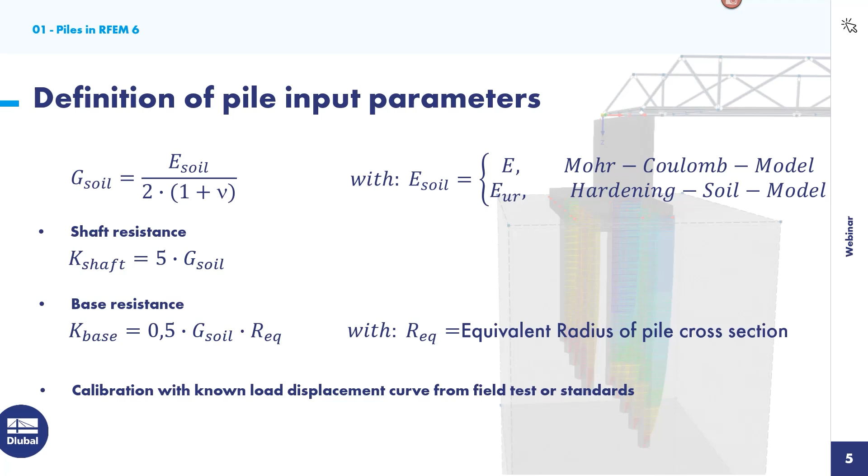Then the pile's behavior can be calibrated with the known load displacement curve from field tests or standards. So if you have a project, you either have field tests or you would consider a known load displacement curve from experience, and you can calibrate your single pile model so that it reaches the load displacement curve you expect or need for your project. If your single pile model can represent this load displacement curve, then you can use this pile input in your main model with more piles.

Yes, and we will do this. I have this example prepared—well, I haven't prepared it myself, but we use this example known from the literature, and the slides I'm currently showing are provided in the download on the website for this webinar. In this literature, you can find a deeper description for this project. There is a pile load test done in this Alzey Bridge project, and this curve was received. Our aim now is to reach a load displacement curve that fits this literature result.

The shear strength and shear stiffness, and the axial strength and stiffness, were calculated and then put into RFEM, and we received the load displacement curve. This model we will now create together. So therefore we go to RFEM now.

I just open RFEM, and via this button we create a new model. We get to the base data where we can give it a name. I will call it single pile model. And yeah, that's it.

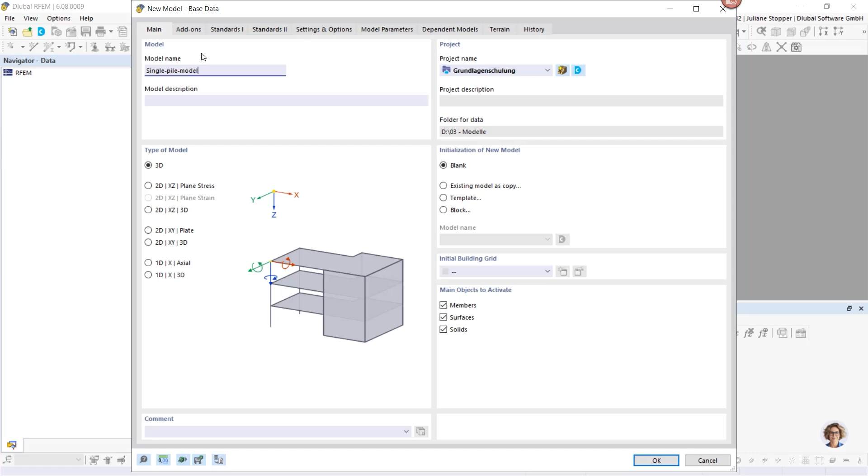We can now go to the next register, to the add-ons, and here it is required to activate the geotechnical analysis add-on, which you find here in the special solutions, and we also need the construction stages analysis.

With activating these add-ons, our main program, the finite element analysis program RFEM, gets these add-ons' input options integrated, and also the analysis, and you will also have the output in the main program. So these add-ons are directly integrated into the main program. You can work in the main window, which is a good thing. It's easier to have a good overview of your model.

Okay, so now we have an empty model prepared, and I would like to delete all unassigned basic objects. RFEM keeps in mind which objects you used in your last models, and provides these in a new model because you might use similar materials or sections or something. But I want to start from scratch, that's why I deleted them.

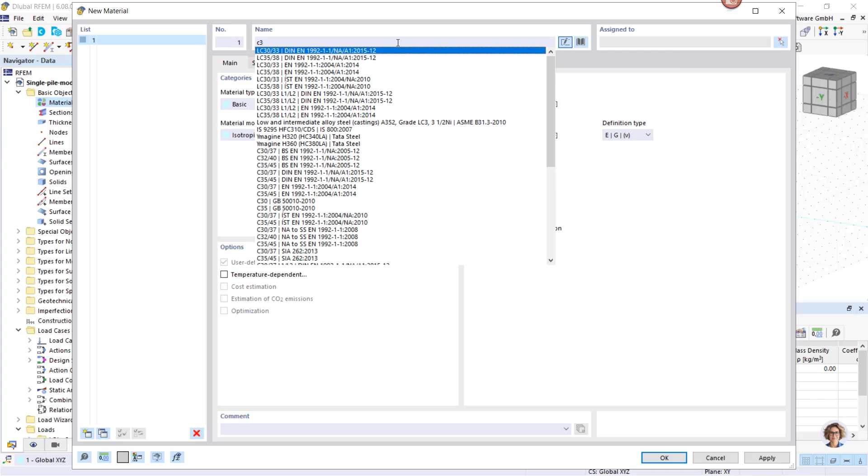Okay, now we can come to the material. I do a double click here and come to the material dialog, and in a first step we will define a concrete. I will take C30/37. We can maybe change the standard. Yeah, we take this one just for the start. I can go on apply, and I want to make it user defined as I want to change some values.

The specific weight is reduced in this example as it is a 1D object, and in the area where the cross section would actually be placed of that pile, there is a soil material placed. This soil material already has weight, so as they overlap the cross-section of the pile and the soil's own weight, we put here a smaller weight so that the sum is the right value. I go on apply.

And I also change the E modulus as it was defined in the literature for this single pile test.

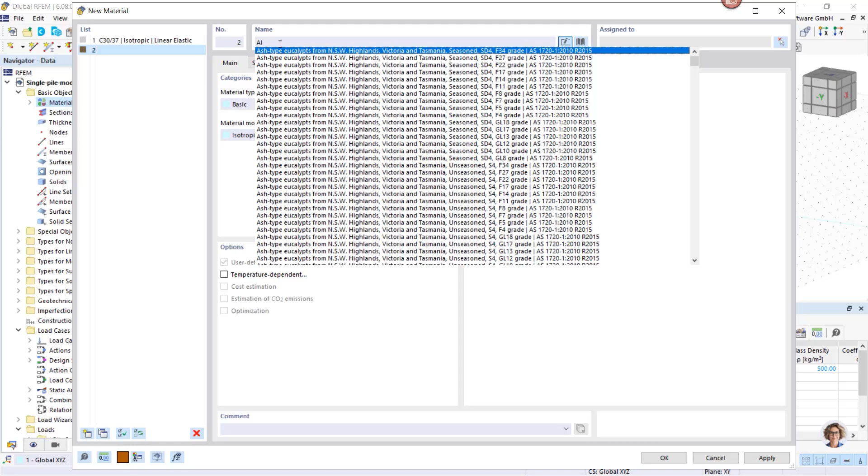Okay, then I have the concrete prepared, and I would like to create the soil now. I have the Alzey bridge soil - I call it like this, as the project was named like this. If you have soil, you have to change your material type to soil for receiving the specific soil material models here in the material models menu.

We will use today the modified hardening soil model, so I activate it, and in this base register I can define the weight. I have the drained specific weight here and the saturated specific weight here. Okay, and then I can come to the specific register for this soil material, and I would like to define the material values for the soil now.

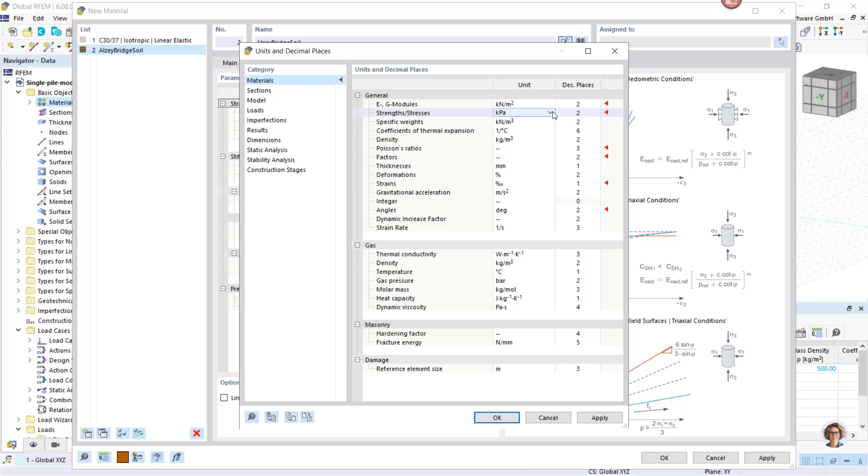I would like to change the units, and you can do this in our dialogues via this button here. I would like to have kilonewton per meter square for the E modulus and also for the strengths. Okay, so now for the cohesive strength we would have 20 kilonewton per meter square, and a friction angle of 20 degrees was found in that soil of that project.

We have P reference, the reference stress for the stiffness, of 100 kilonewton per meter square, and this power here is 1. The oedometric primary loading stiffness is 27,150 kilonewton per meter square, and the shear hardening parameter shall be 6.9.

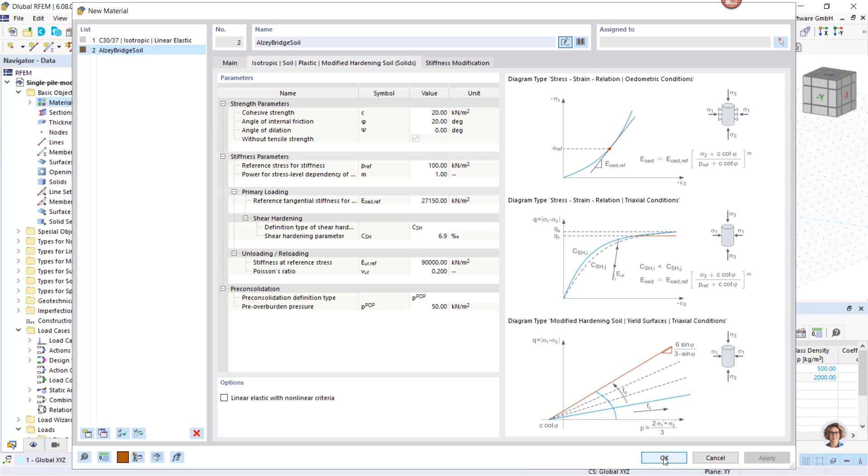The stiffness at reference stress for unloading and reloading is 90,000 kilonewton per meter square, and the Poisson's ratio is 0.2. And we have a pre-overburden pressure of 50 kilonewton per meter square. I say okay, and my materials are defined in that model.

Now I can come to the cross section of the pile. As our pile is made of concrete, and we have defined as a first model the material, the concrete, it is selected here. You could also define here a new model material or take one from the library, but for us this is perfect.

Then we have a circular cross section, so I can select it here. We have several cross sections provided that are more often used, and you can directly define the diameter here. You could also define it in the name, you could also find it here, but this is fine for us. It shall be 1.30 meters in this example. So I have my pile defined.

That's it for the basic objects in this model. We don't need any further settings here. We can come to the geotechnical analysis settings. So the first point we want to define is the boreholes here.

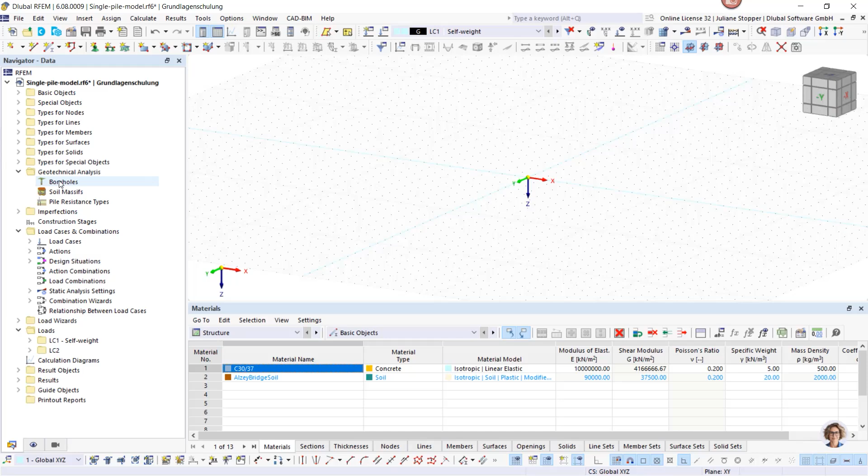I do a double click and we come to the dialog. The boreholes dialog is for defining the soil stratigraphy that was found for this location. Here we keep the 0 coordinates. Then we can define the groundwater.

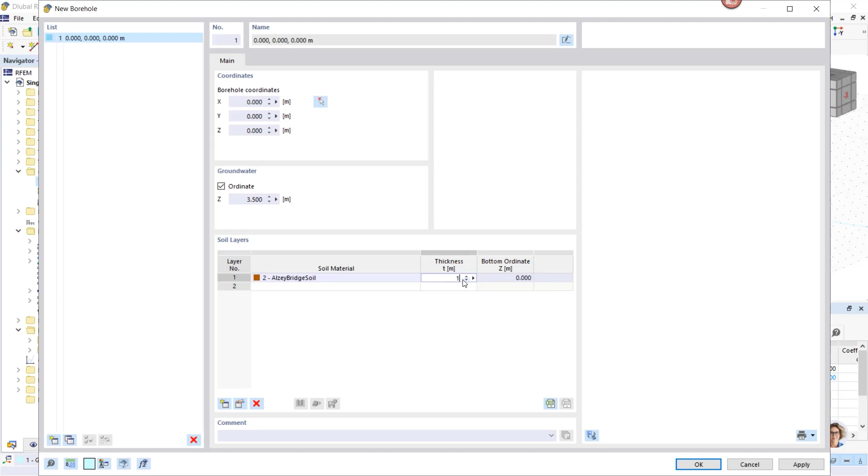So we can come back to our model and we can define it. We have here 3.50 meters, and we have only one soil layer in this test, and it is 19 meters. I say okay, and we have our soil defined here.

Then we can come to the soil massif. I want to create a new soil massif. Here I assign my borehole, and I have a soil massif that will be generated from boreholes. The center of the massif can stay here, only I have to give the size of 26 meters. And I can, in the options, activate my groundwater, so the groundwater level will be considered. This soil massif helps us to generate the soil solids that we need, and agreeing with say okay, now

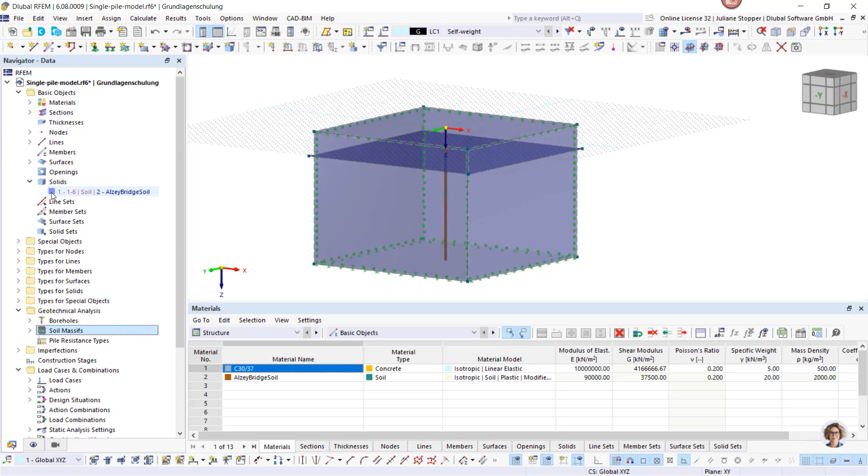my soil solid is generated. We can have a look at the basic objects and see what was generated. We have a soil generated, we have the boundary surfaces, and we have the groundwater level surface. And we have here, we can see in types for surfaces, we have also the surface supports.

I want to delete these, they are not needed in this model. These are the ones of the soil solid. So I want to have a short look at this display navigator.

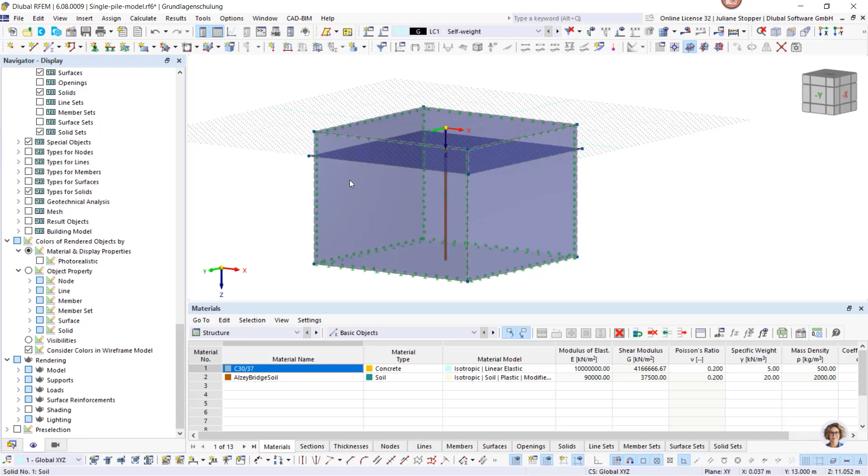Here you can do a lot of settings regarding the display, and I would like to see the colors of my soil dependent on the object property. This looks better for me, and I would like to not have the surface supports shown, so I do a click here, and I don't want to see the borehole any longer. I don't need this right now. It's still in the model, it's only not displayed because I want to place my pile there.

Okay, then we can come back to the data and we define our third geotechnical analysis object. We define the pile resistance. So I click on new pile resistance type, and I will show you one thing.

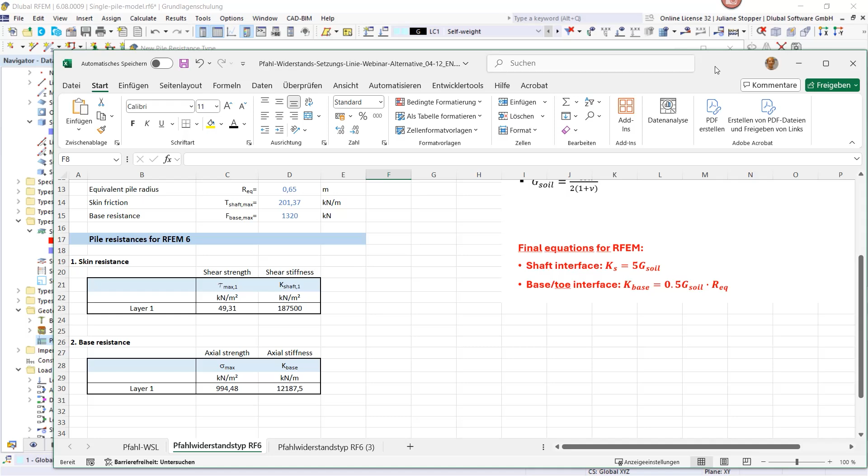This is a table I prepared where I calculated the input data with the equations that were shown on the slide. I put here the unloading, reloading E modulus. The shear modulus is automatically calculated from that, with the Poisson's ratio. And these are the shear strength and shear stiffnesses, axial strength and axial stiffness, and I can now give it as input to my model.

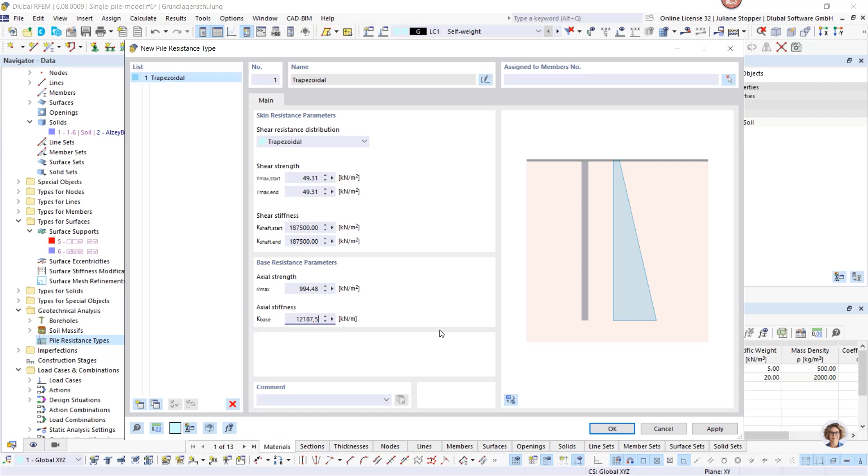We have here 49.31 and 49.31, and I have here 187,500 as shear stiffness for the shaft, and I have as axial strength 994.48 kilonewton per meter square, and we have 12,187.5 kilonewton per meter. I say okay, and I have this prepared in my model.

Now I can define the pile. I would like to do it this way. I do define a node here, and now I want to copy this node. I go on move and copy. I create a copy 9.50 meters into the Z direction, and I want to use the step links, which allows us to have a member defined automatically between the original node and the copy.

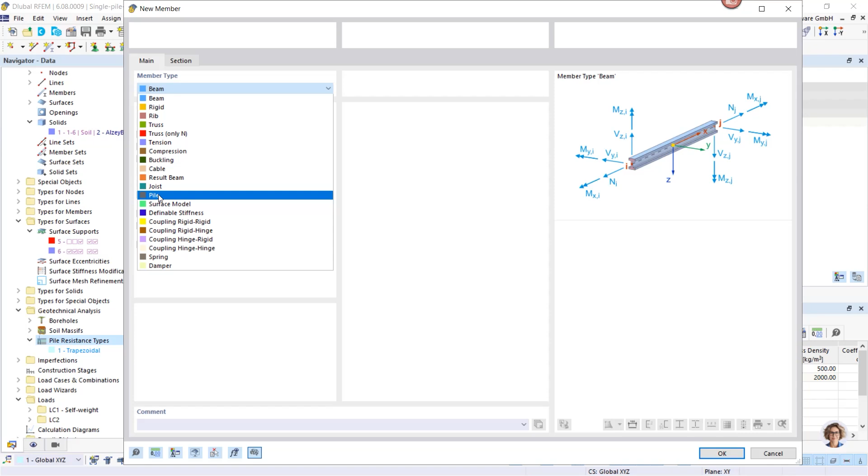Only I have to give here the settings for the member, so I create a new one, and I want as member type, of course, to have the pile. For the member, we can see here in this register that our cross-section is assigned, and I want to have a look at the pile, and here the pile resistance type is assigned. We did define it before, so it's automatically found. I can say OK, and again OK, and then here we have our pile.

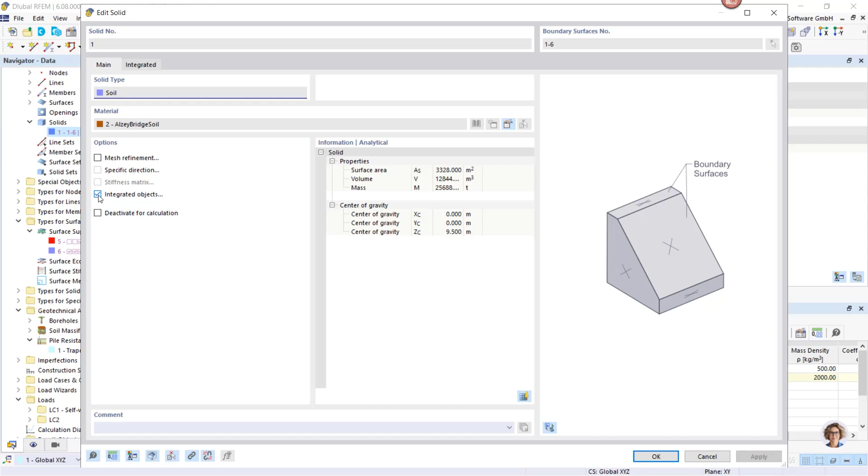So now the geometry is prepared. We have only one more step to do. We have to go into the soil solid. As the pile has to be integrated into the solid, we activate this option here, and we can see in the new register that we can integrate objects here. And we would have to integrate the line of the pile, so I can pick it here.

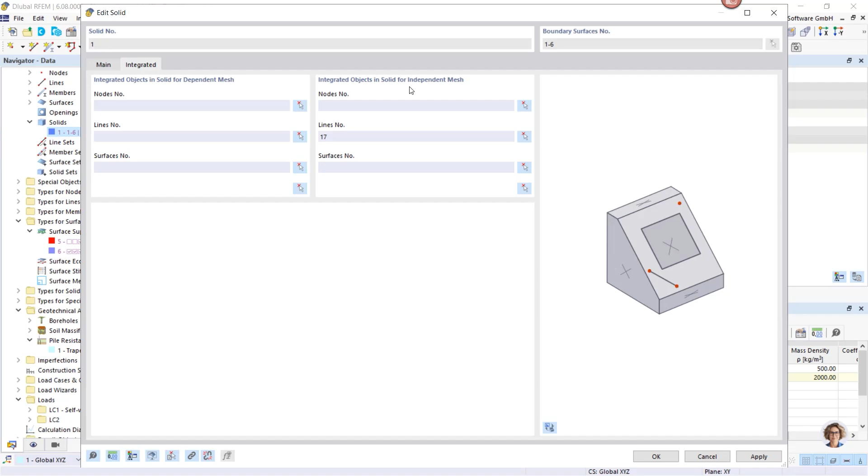Here it is, line 17. It has to be integrated with an independent mesh. That's why I did put it on that side. We say OK, and now my pile is integrated into the solid.

Then we can go on. We can start with the definition of the construction stages. So I do a right click here, and I can say new construction stage.

Soil has a stiffness that is stress dependent and dependent on the load history, and these characteristics are resembled if an advanced soil material model is used, like the hardening soil, which is able to represent this behavior. It is required to use construction stages. That's why we use it for the hardening soil, for having the deformation of high quality in the analysis for the soil.

So the first stage is stage 1, and I would like to give it a name. It helps with having the overview on the phases. It's our initial phase. This is for calculating the stress from soil self-weight, so that we can afterwards use the correct stiffnesses.

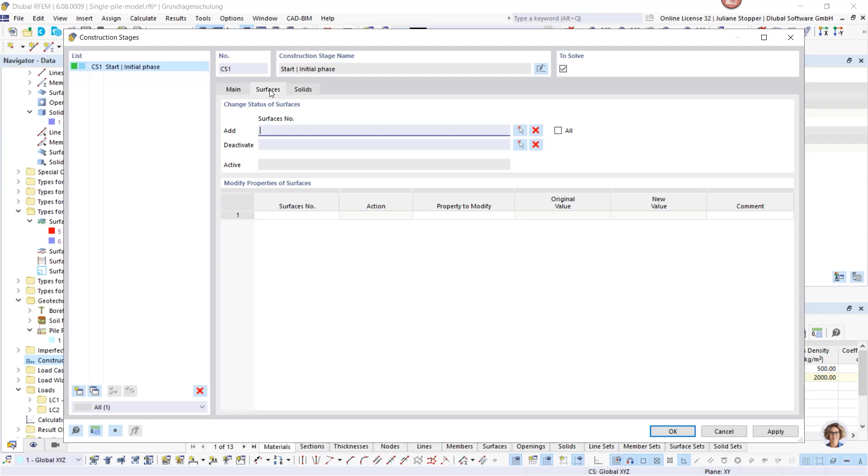Here I have to assign the solids. I can activate the solids here, and I can set all. Then my soil solid is used. Then I also need to activate the surfaces in this step. I can also have a click here on all. They are needed here to have the surface supports of the soil massif considered. I click on apply, then it is in the model.

I define the next construction stage. It's the nil phase. For the hardening soil model, it is required to have in a first phase the material linear elastic, and in the second stage the hardening soil model is activated. So this means in this stage we don't need to change any of these objects.

Now I create the next stage, and this is the stage where the pile is activated. I define pile activation, and I go here on members, and in members I can activate the pile.

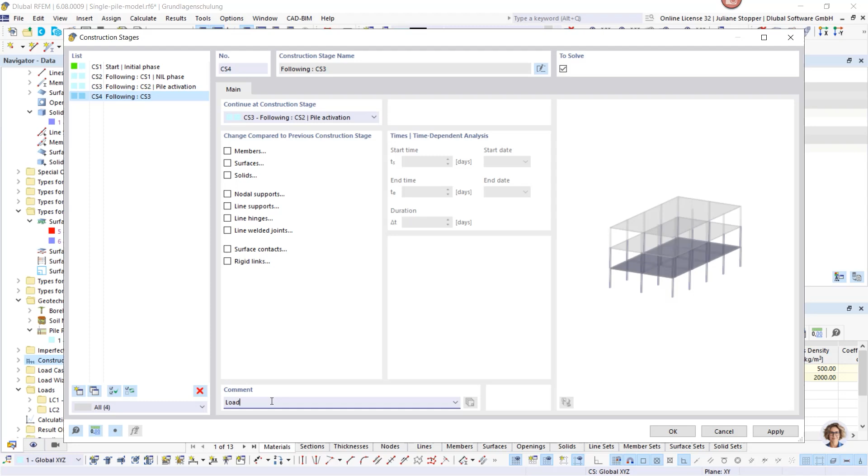Okay, then we have it, and we can come to the last stage of this model. Here we want to assign the load, so I define it as loading, and we give it as OK, and we have the stages defined.

Then we can go to load cases. We have the geometry defined, and we have assigned all the objects to the stages. Now we can come to the loads. I do go here, and maybe can go here to the base. We don't need to have the combination wizard in this model, and also this setting I don't need. We can go to load cases.

We have the self-weight, and in the geotechnical analysis add-on, this self-weight load case LC1 is the load case for the self-weight of the structure except soil solids. And the second load case has action category permanent soil active, and it is the self-weight only for these soil solids. So I call it soil self-weight.

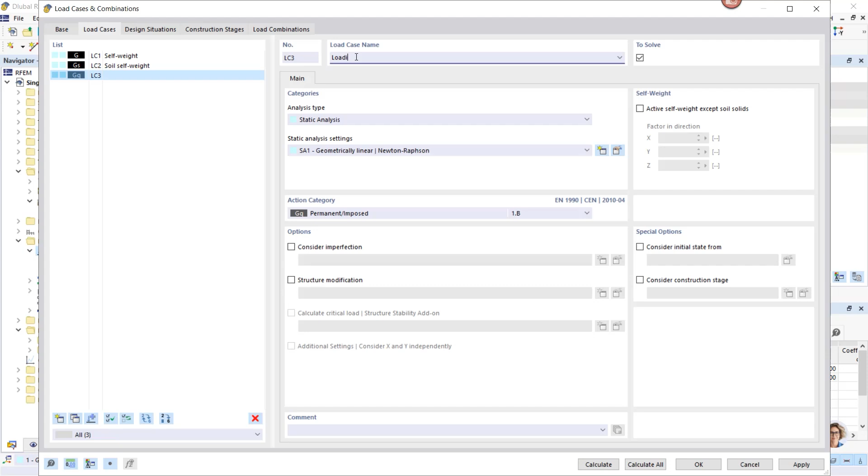Okay, and then we need one more load case, which is the loading. I will give it as permanent imposed, and it is the loading. Then we can go to the design situations. I don't need them in this model, so I deactivate them. We can go to the construction stages.

We are now here in this first step, and we can have a look at the load cases. And as we said, we want to use this, or we also need to use it for calculating the stress state of soil self-weight only. I go on apply, and I have my soil self-weight here.

And in this stage, the material shall be considered as linearly elastic. So I can do this with activating a structure modification, and I define a new one. I don't need this setting here. I want to have the material's non-linearity deactivated, so I give a click here, and I also want to use the comment to have a better overview. I call it linearized material behavior, maybe.

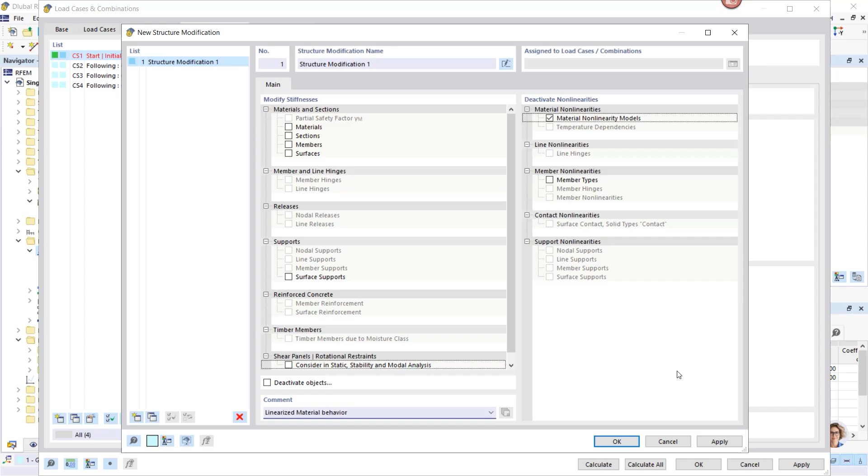So we can click on OK, and then we can see also the comment here, and it helps. We can see now in stage 2, the structure modification is not active anymore, and here the full hardening soil model will be considered. In the load cases, we have soil self-weight, which is fine.

Then we can come to the next stage where the pile is activated. Here we should, at least in the latest, activate the self-weight of the pile too. And I would like to use a different static analysis setting. We click here and define the equilibrium for undeformed structure here.

No, I mean not in this. We create a copy where we use the equilibrium for undeformed structure setting, and I want to use load increments and save results of all load increments. With this setting, the deformations are reset to 0, which means in my result I will not have the displacements from the previous construction stages.

I will not have the displacements from the soil self-weight. We need to know the stress state to consider the right stiffnesses, but we don't need to know the displacements from the previous stages. That's why I use this setting, and we change it here to this. Then we can come to the loading phase.

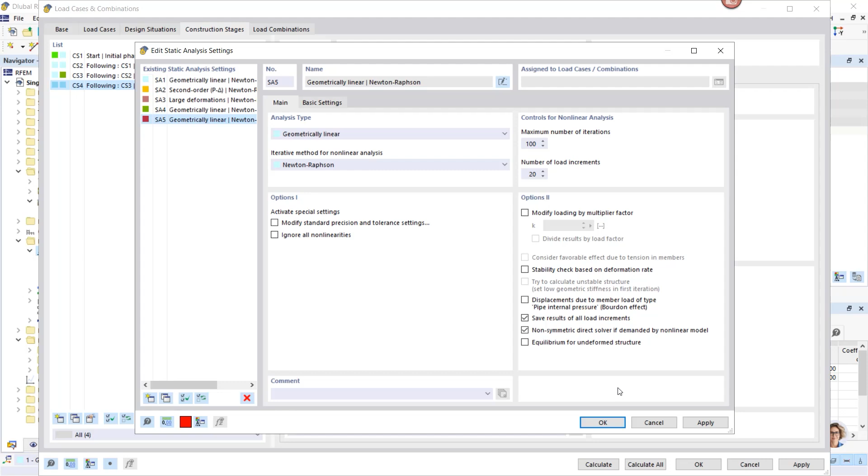We create another static analysis setting. Here I want to use a higher number of load increments. Let's consider 20, and I want to save results of all these load increments too. We go on OK, and I switch here to static analysis setting 5.

This is fine then, and I should activate the loading in the loads. Okay, then that's it. I say OK, and I have the load cases in the construction stages for the load side also considered, defined. Now we only have to put the loads.

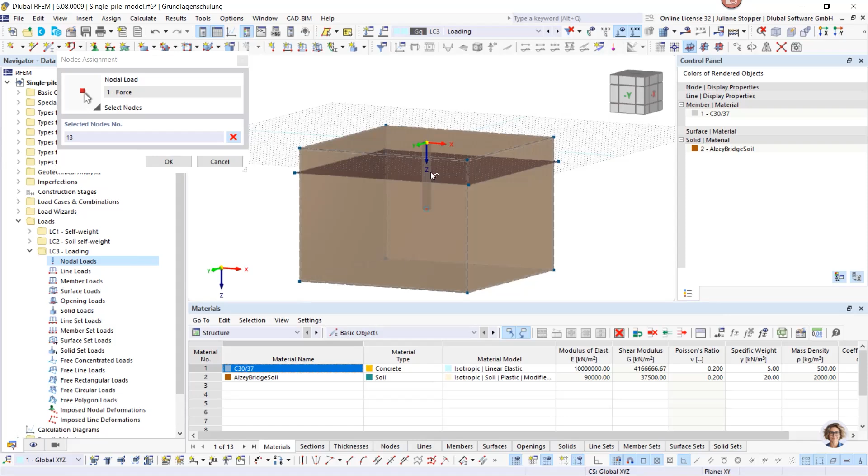We have the load cases prepared, and we can see them here. We have the self-weight and the soil self-weight. They are calculated automatically. Only what we need here is in load case 3 to define a new nodal load. So I click here and assign it to this node. Say OK, and let's take 3,500 kilonewton. We say OK, and then this is fine. Okay.

Let's save it, and then we can control this model. I would like to check graphically the stages.

We can see here now construction stage 1, and we can see that the soil solid is assigned in the next phase, stage 2. Then we can see in stage 3 the pile is considered, and in stage 4 also the load is considered, which is as wished. Okay, then that's it for us.

Our model is prepared. We could start the calculation now, and I would like to show you here. We can go on calculate, and you can here calculate all or go on to calculate.

I would like to show the calculate in cloud to you. You could click here, and in this dialog you could select the machine that you want to use for the cloud calculation. Let's use this one, and then you can say calculate in cloud.

The model is uploaded, and you will get an email that your model was received and the calculation is started, and then later you will get an email that the model is solved and you can download it. In the meantime you can go on working without any performance problems caused by a model calculated in the background. So this is an option you can use.

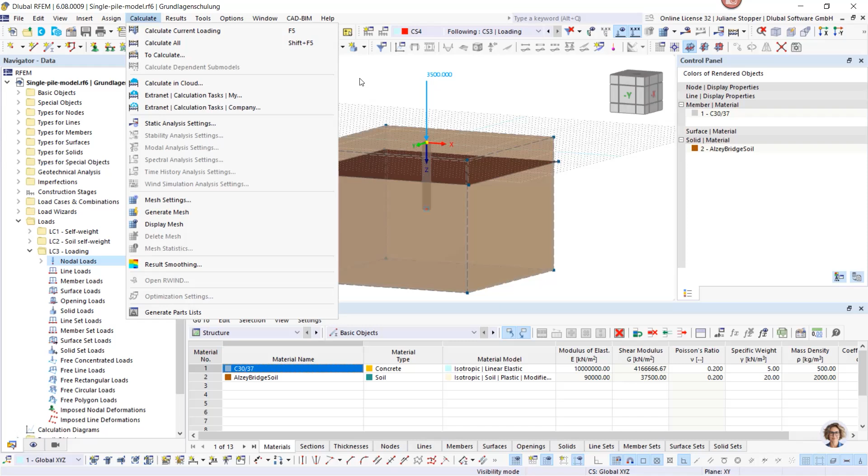In the PowerPoint slides that we will have available in the download, you can find a knowledge base article that I put there about the cloud calculation. This you can also find on the website for Dlubal software. You can find literature on cloud calculation, some further information.

Okay, so now I would like to show the calculated model to you. I bring the results to you. This one was also solved in the cloud, and now we can come to the result.

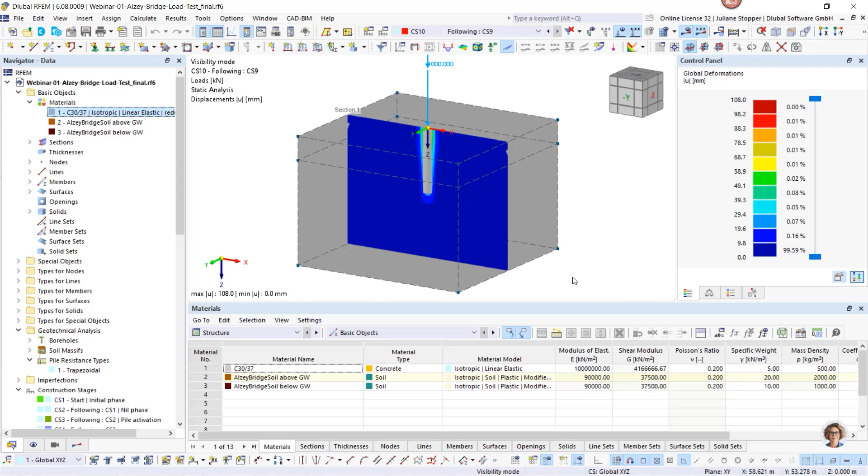Here we see the results, and this is the result of stage number 10. We can go here too. You can see the deformation. It's the deformation in the results section. We will come to this later.

We could also check the full solid, how it looks like, and this is the section. What I would like to show to you is what we need it for calibration.

We now want to check the load displacement curve of that pile, and we want to compare it with the expected behavior, as the aim is to have a pile that resembles the behavior of that load test.

So what we need is the load displacement curve, and for this we have a very good feature in RFEM, the calculation diagram. We define a new calculation diagram. We have here the diagram type chained analysis diagram, and this diagram type should be used if you use construction stages. So we can assign the last stage that shall be considered and the stage where the consideration shall start.

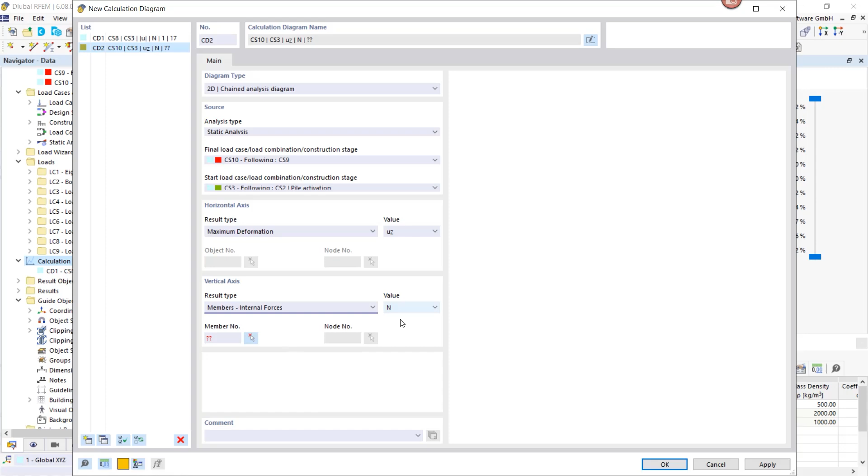And now we have to define the type of result for the horizontal axis, and we want to check the maximum deformation, and we can also here use UZ. On the vertical axis I want to see the member's internal force, the normal force. We can select the member and the node of the pile head, and then our calculation diagram is prepared.

You see we have more registers. We can here go to the diagram where you can see it better, and you can also use the settings here, get the values at these points, and you could also print this. You could print it to the printout report.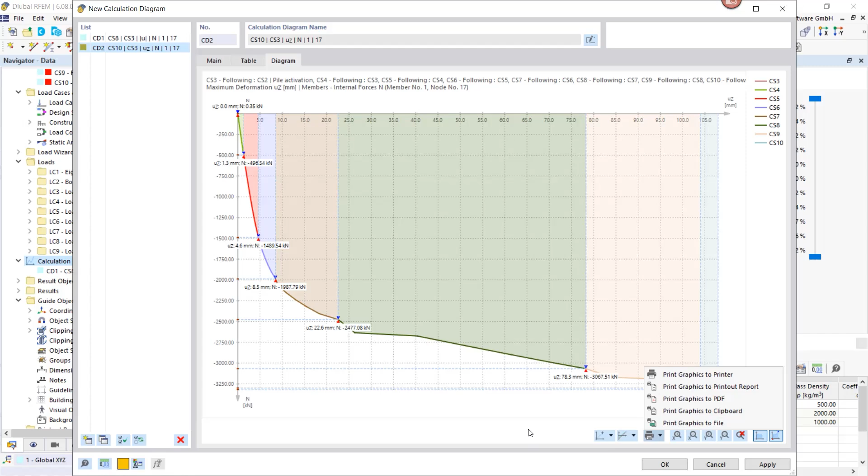We here do have also the table with the values, and you can export it to Excel, and this is what we do. We export it to Excel. We agree, and now this is exported. I want to close it, and I want to show you the results.

So this is the way you get it after the export, and I did create a diagram with that.

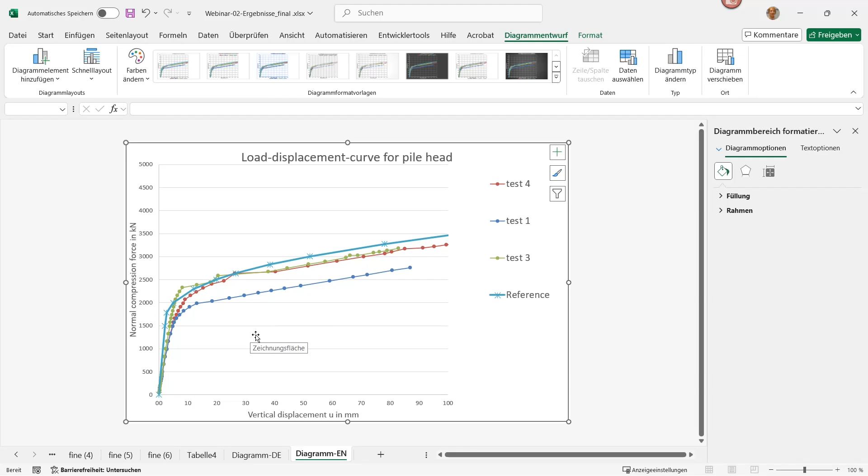I want to show you this. We have the values from the program, and I have put it together with the reference curve. We can see this curve was the first one I received from the calculation we prepared together, and the reference solution is here, the light blue curve.

We see that we are a bit far from that curve. We could model our pile with higher capacity, with higher resistances, and this is what I did. In the next step, I adjusted the input for our pile so that I can come closer.

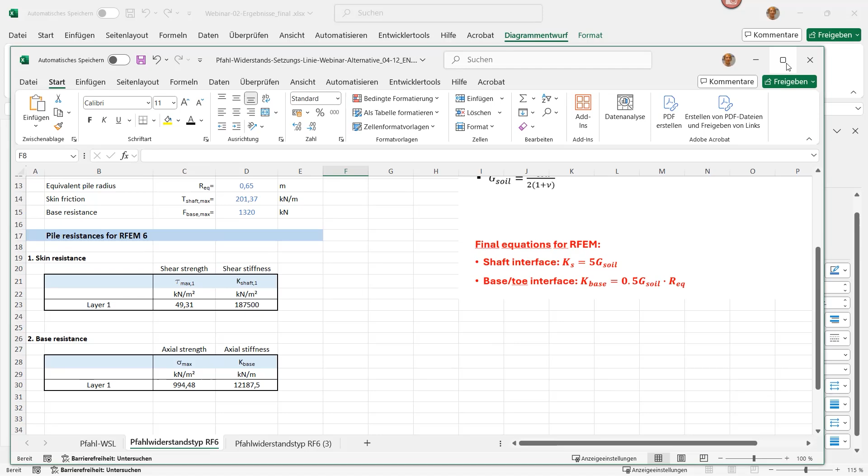We can see that here mainly the skin friction is leading. For getting this curve higher, we need to use a higher skin friction, and I did this in the next stage using my table with default values. Then I calculated the difference roundabout, and calculated a new shaft friction value and a new shear strength.

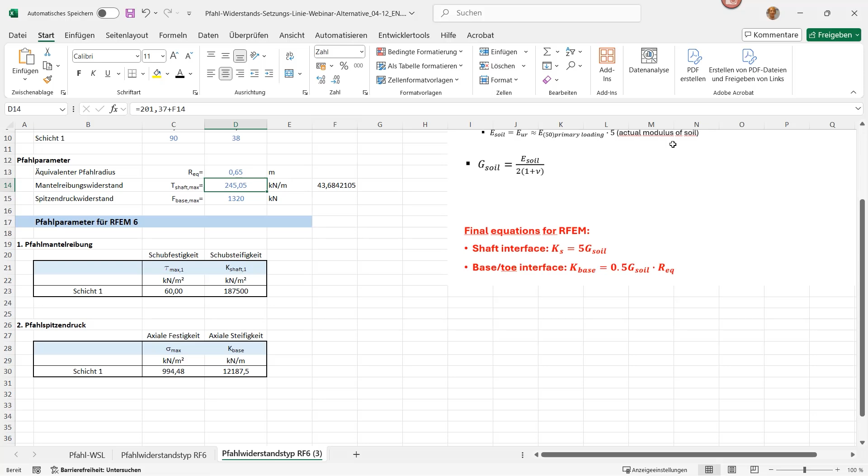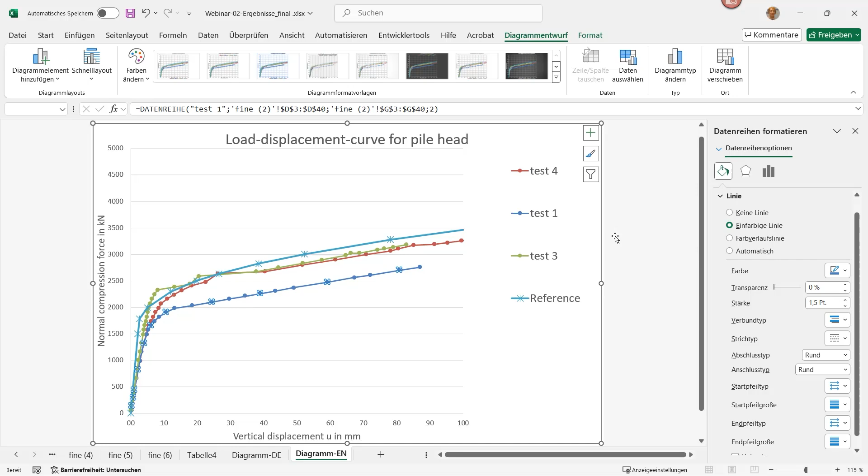So we had this before, and now we went with 60, and then it was close enough. With this input value I calculated it new. We can see here also - this is with the model of the first results, and here it's with the adjusted pile resistances.

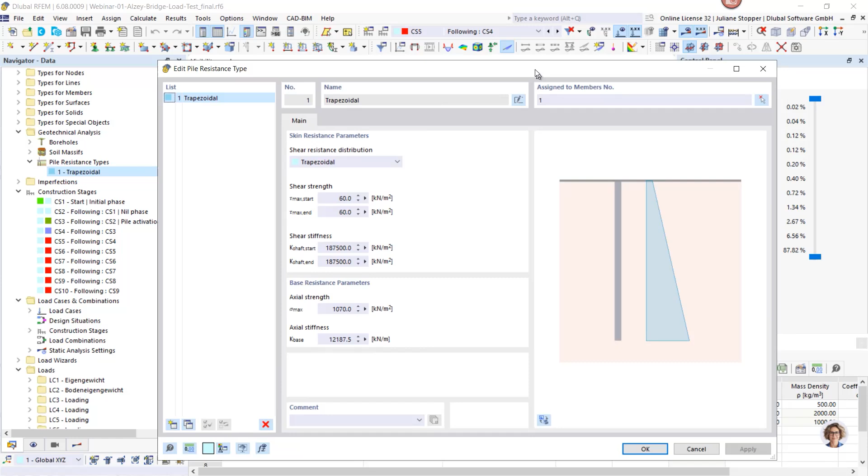We can see here it did open up on my other screen. Here we can see that I adjusted the shear strength to be 60, and with that model I was close enough to my reference solution. I know now with this input and with this hardening soil material that I used in that model, I am quite close to my reference solution, and the requirements are satisfied, and with this input I could go into my main model for the Alzey Bridge project, for the full model.

So we can see it as finished the calibration process. Okay, that's it for the first model, for our single pile model. This is what I wanted to show. Now we can go to the next model, to the second part of this webinar.

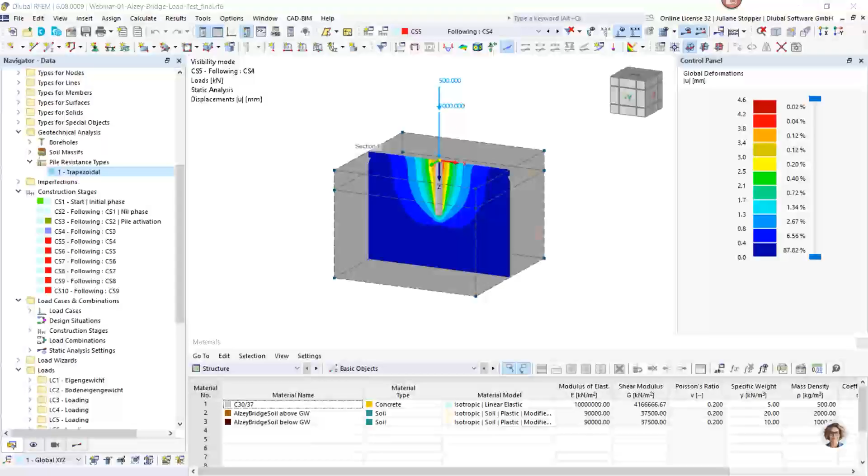Therefore, I get this second model for us to here. Okay, this model I would like to use now with you. As we can see, we have here a bridge and a foundation for the bridge with deep foundation.

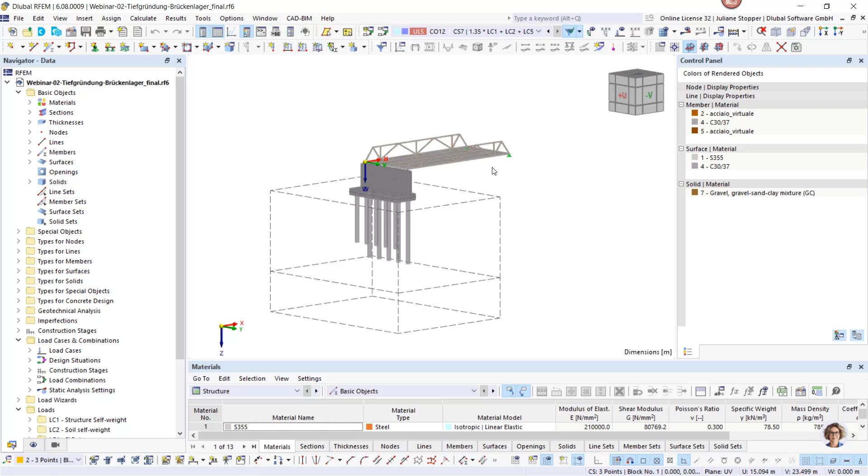In this model, this bridge is a graphical object. I imported it from our Dlubal blocks, and it is not active for calculation, but it could be, of course, activated, and you could have not only the foundation with the piles, but also the bridge in the model, and calculate the full model. So this is an advantage of our program - you can have the superstructure and the foundation together, and directly see the effects of a change in the superstructure on the soil, or a change in the soil and its effect on the superstructure. So you can have the full model and check the interactions directly.

Okay, so this is the model we have here. We have construction stages used, and we can have a look at them graphically. We again have the initial phase where the material is linear elastic, then we come to the next stage where the K0 phase is happening. This means here we have the hardening soil model in this model 2, and here it is activated fully. Then we come to the third stage where the piles are activated, and then the slab and this surface are active, and then the loading comes.

We can have a look at the loading. This is the load of the upper structure, and the next step would be to have the bridge and have the load from there. Okay, these are the stages, and this model is already calculated, so we can have a look at the results now.

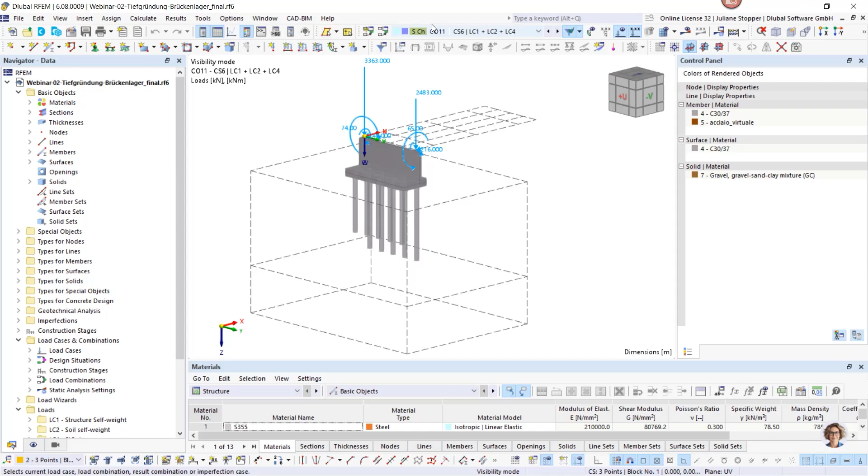I'd like to show this to you. This is the load combination for characteristic combination, for characteristic design situation. Okay, so this is the deformation result. We can see the full deformation of the soil.

Now we will have a look at results and at graphics, and I would like to print them with you into our printout report. That's why I would like to shortly introduce our printout report to you. We have here in the navigator for data at the bottom our printout reports, and there is one prepared. You could also create a new one here. I go on edit to show you the printout report manager.

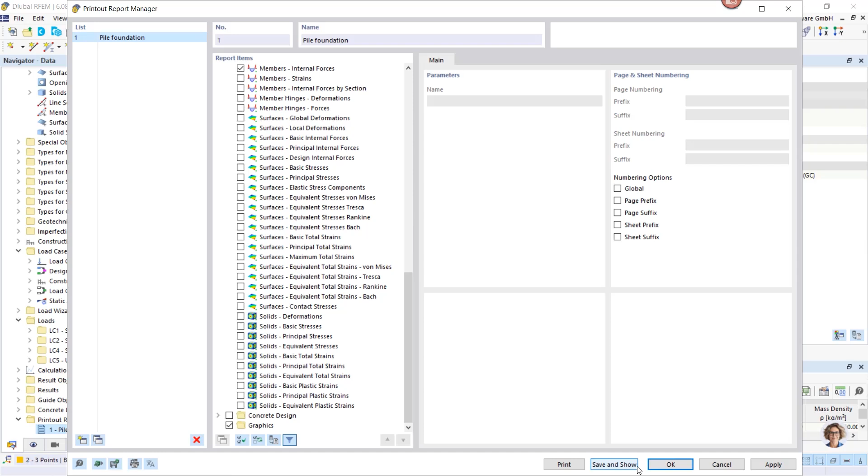It looks like this when you create a new one too. Here you can select the items that shall be contained in the report, and we have here, for example, the materials, and we can activate here the specific soil material models, for example the hardening soil models. This one we don't use, we can deactivate. So you can select all things that you would like to display in that report. We have here the geotechnical settings, the load cases. Then we can say yes, save and show, and it will be opened, and we can have a look at it.

It opened on my other screen again. I'll bring it here for you.

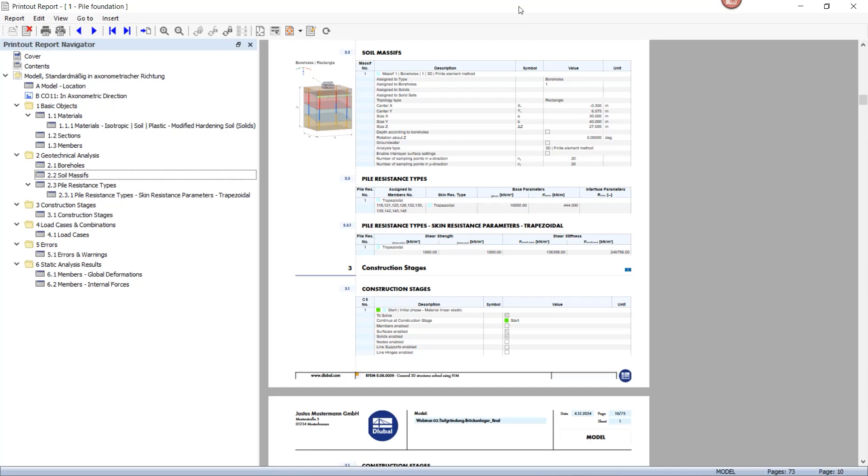Yes, this is our printout report, and this is what we have so far. We have an overview model and the tables that we selected. In this printout report, you can edit the languages, add graphics, add text or headings. You can always remove parts, edit it, and add more parts when you missed something. We can keep this printout report open, which is an advantage of this program: you can keep working, and when you like a perspective, a view or a result, you can print it and directly check your report while working on the program.

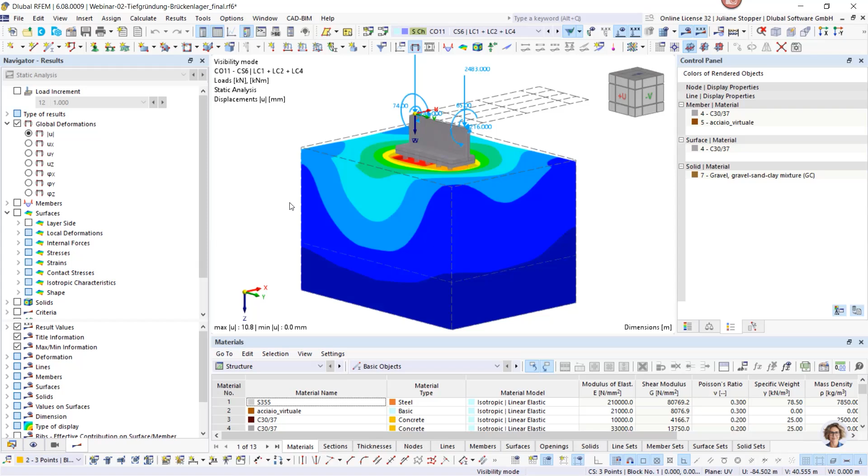Okay, then we can go back to the results. We do see here the displacement of the soil, and I would like to show you a guide object. We have here the clipping planes, and I would like to create a new clipping plane. It should be placed in the pile position, and I would like to see the YZ plane. I go on OK and set active, and then my clipping plane is displayed, and with that clipping plane we can go through the model and check the behavior in the soil.

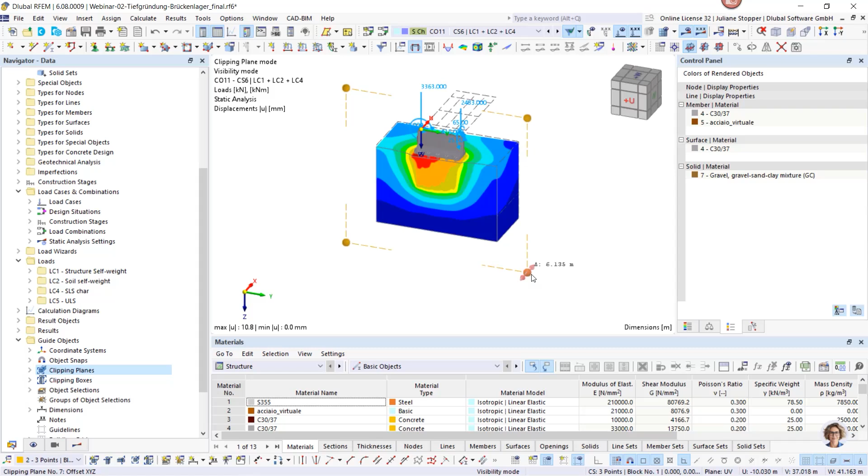You can have a look at it, and we could also print it as an overview or introduction. I would like to go here and cancel visibility mode so that we can also see our bridge. Like this, for example, this could now be printed.

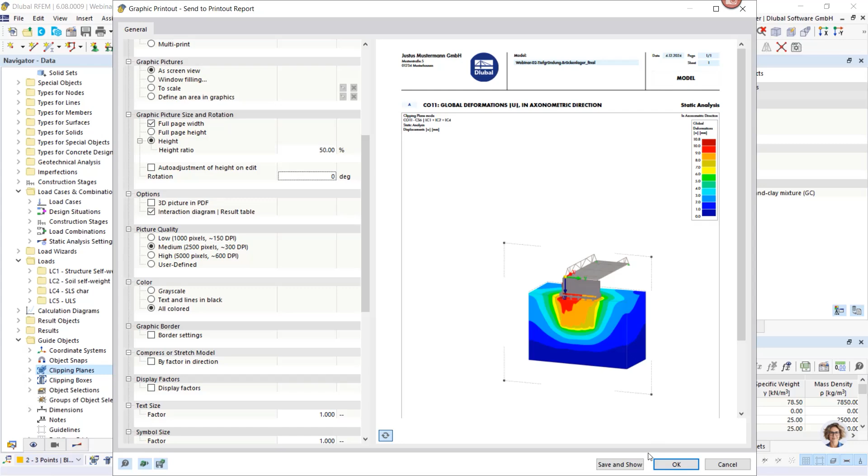We can go here on print graphics to print to the report. You can also use keys that you defined. Now for this graphic we can see the preview, and I don't want to have the color panel here, and I also want a reduced height. We don't need the full page, so we go to height and set it to 50, and we can check it. It should be fine. Yes, I like it like this. I go on OK, and then it is printed to our report.

Then we can go on with checking the results. Here's another option to have a look into the soil. I want to edit the clipping plane—no, I don't want to edit it, I want to switch it off. So I go here and say clipping plane off. It's still there, and you could activate it later again, but for now we don't need it.

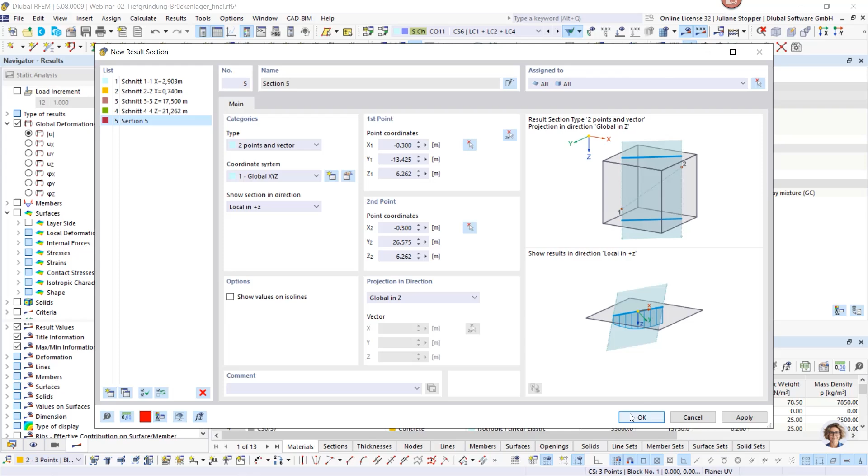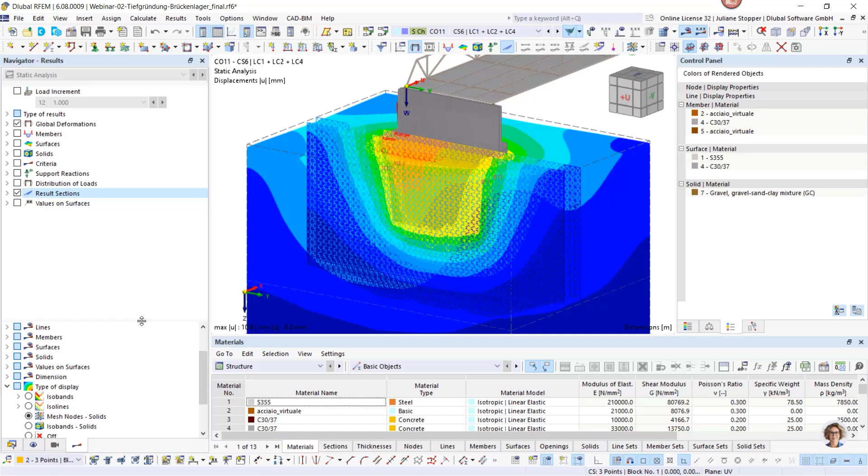I would like to show you the results section. We can click here and define a new one. I would like to go from here to here, right through the soil solid, and then you get a result section. It has to be activated in the results, then you can check it, and in the navigator for results you can activate the result you want to see, and at the bottom you can change the settings for how it shall be displayed, and we select the isobands.

For the result sections we can also say that they shall be drawn in the foreground, so we can see them always. I have more result sections prepared. I created them the same way, and put them into the plane of the pile positions. These result sections I created are here. Now I don't want to draw them in the foreground, so that we can also see the positions of the piles.

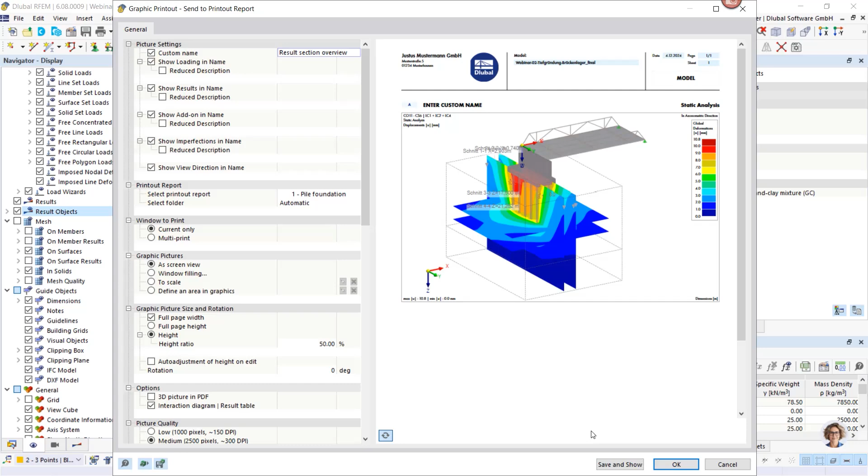We have here in the navigator for display the option to activate the names of the result sections. Now I want to print this as an overview. I go here on print graphics, and RFEM kept in mind the last setting, so now it uses the half page. I want to have a custom name here, and we call it result section overview. I say OK, and now it is printed to the printout report.

Now we can go on and just print the results. We can go to the first plane of the piles, and we need to have the control panel, and then you can print this.

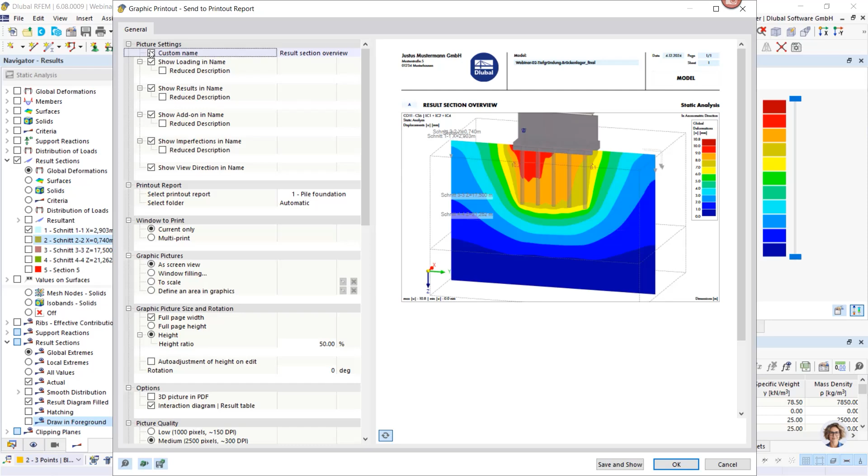Like this, we can say OK, and print this cross section result section, then print this one for this row of piles. And again with this control panel, we print this one too.

Then we can also print the plane of the pile tip. We can have a look here, and go on wireframe model so we don't see the model, and print the results in that zone. We say OK, and then use the last cross section, print this one. I now use Ctrl and P to print.

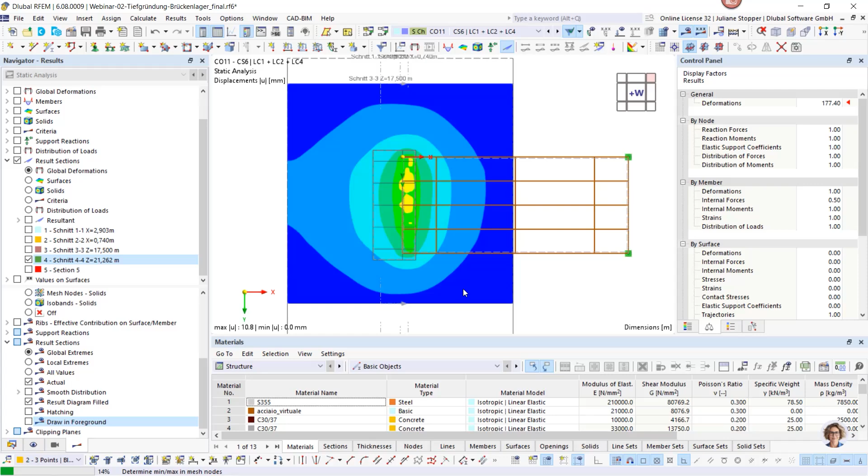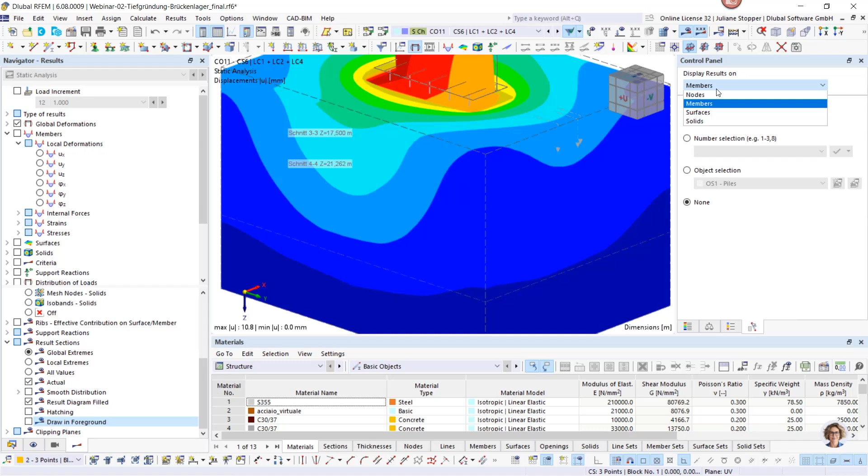We say OK. So now we have a good overview on the soil results, and we can check the piles. We activate here the member results. Now I want the global deformations. In this control panel, you can switch off the solids and the surfaces, and what we have then are the members, so we go to the object selection.

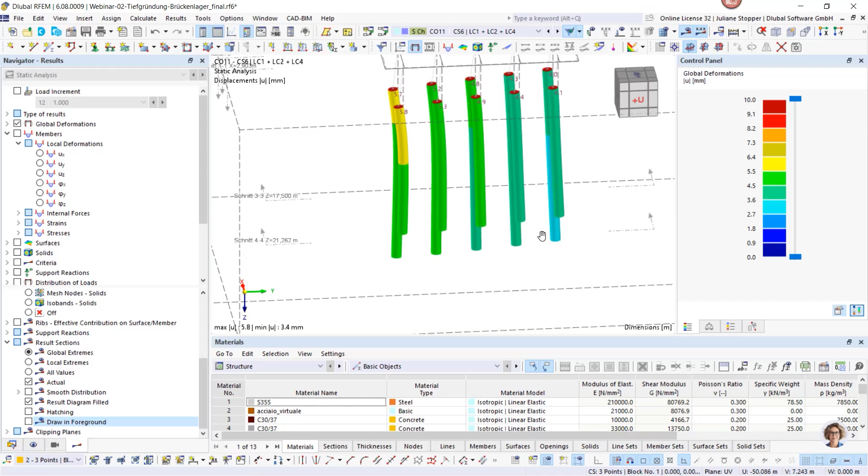I prepared an object selection for the piles. We have here the results, and we have an overview on the pile deformations in that model, and we can print this too. So Control and button P, and we can print it.

You could, of course, write user-defined names for these views, but I only want to save time now. Okay, so now we have documented all the deformations.

We can stay with the piles and go to the inner forces. So we go here, internal forces, and we can see them here. I want to switch off the results section names, and we have the inner forces here.

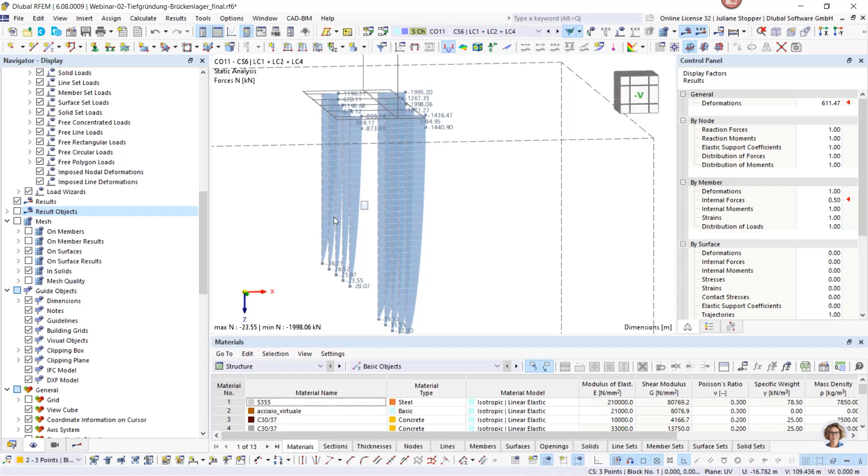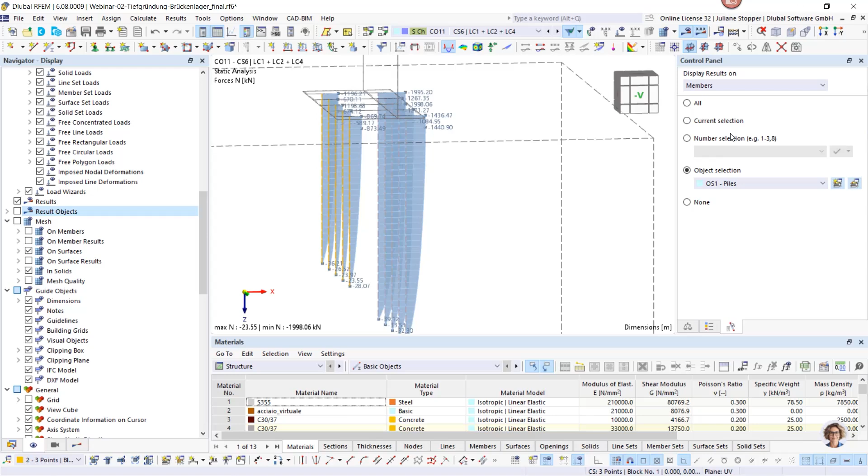For a better overview in the printout report, I want to create another object selection with view. For this, I select these piles, do a right click and say create object selection, and call it pile row short, as these piles are shorter, or any name you could give. Then in this control panel, you use this object selection, and we want to only see this pile row now.

We have here in the results for the piles, for the members, the option also to use it with colors. Now I want to print it like this, again to our printout report. So I again use Control and Print, and what we want to use now is our multi-print. For this, I deactivate this button, as I don't need refreshed images.

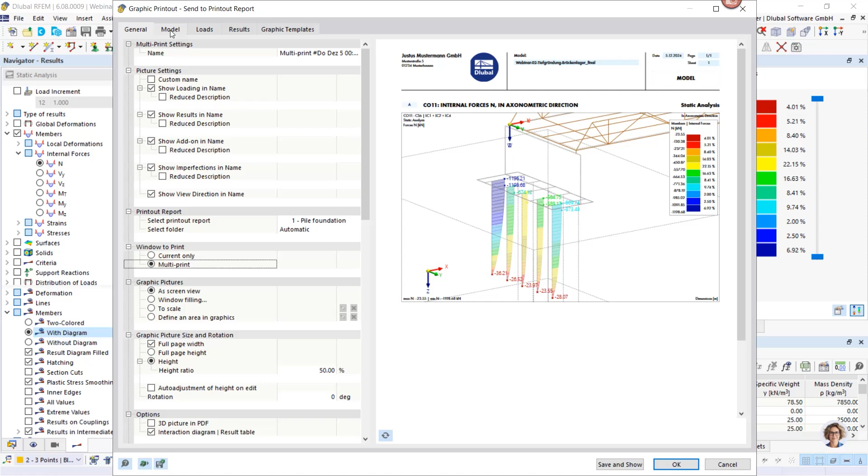It reduces the performance. So we go on multi-print here, and then these registers appear, and we can go through it. I don't want a new view on the model, and I don't need the load cases here. What I want to print is the results: the normal force, the shear forces, and the moments. I say OK, and now for this view, all of these results are printed.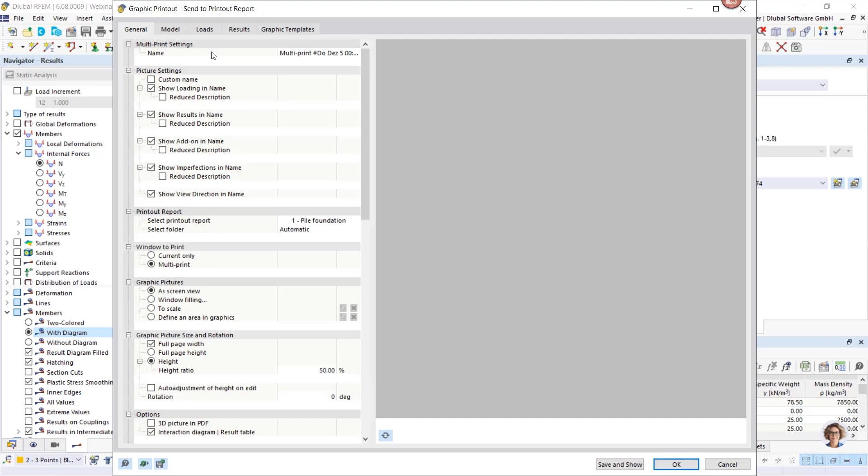I have the other object selection prepared. We could do the same together, but I have it prepared and want to save time. So we can now print this one, use also the multi-print, and again uncheck these and check these, and we say OK. So now we have the internal forces printed.

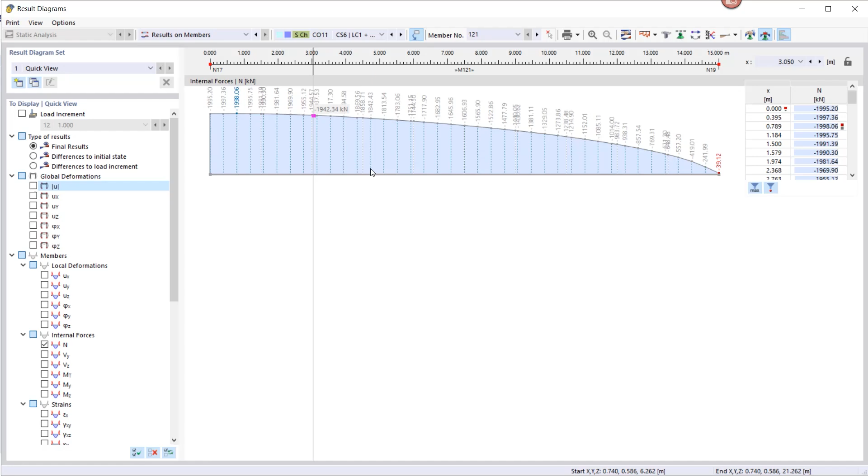Then I would like to show one more result. We can also look here, and you could do a right click on each member in RFEM. You can always do this, and if you have a member, you have result diagrams for this member too, where you get a detailed result along the length of that member. So we have here the normal force, and we could also print the internal forces in such a detailed way, and here we have the option to print it to the printout report.

Just as an example, I would like to do this. We say OK, and it is printed. Now let's go back, and I want to show you some soil stresses. Therefore we go here on solids, and I would like to show the principal stresses 3D, and we have to activate the solids again, as I had them deactivated.

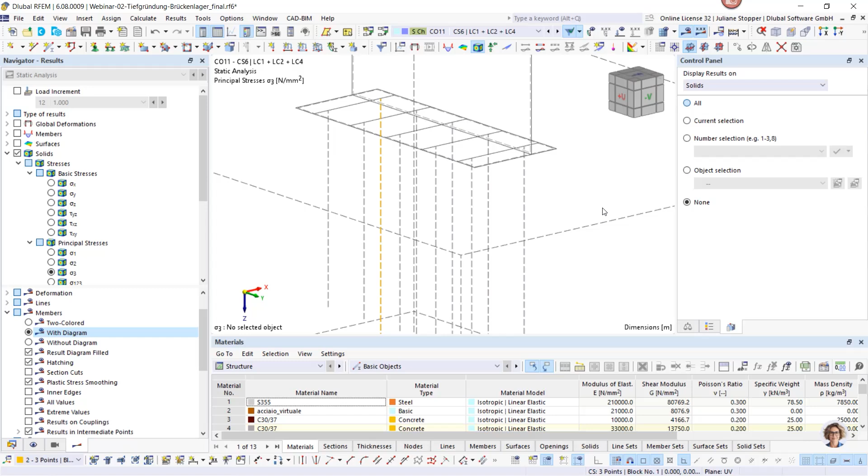We go here, and we have a special type of display for solids that we want to use. What we see now is from this load combination that contains the characteristic loads for serviceability limit state, and it is the result, the stresses of all loads as final results. So what we have contained is also the stresses from self-weight of the soil, but we are now interested in the stresses that come from our project, from our construction, from our structure. We can check this result here, and if we change the type of results, we can see the differences to initial state as result.

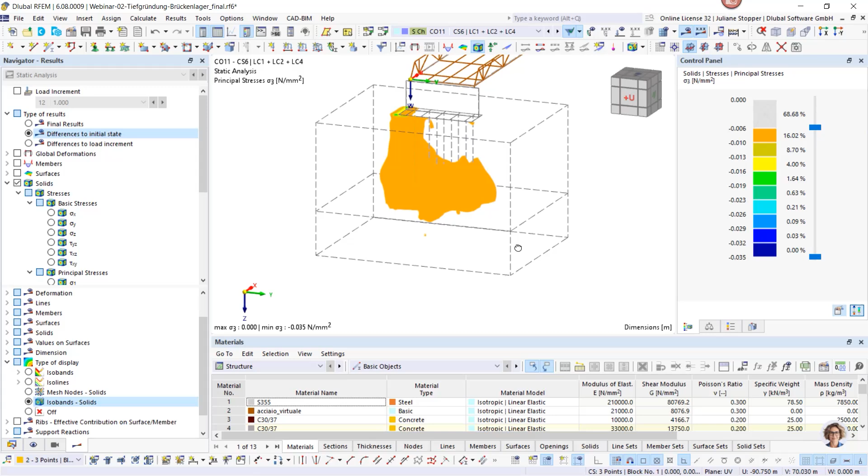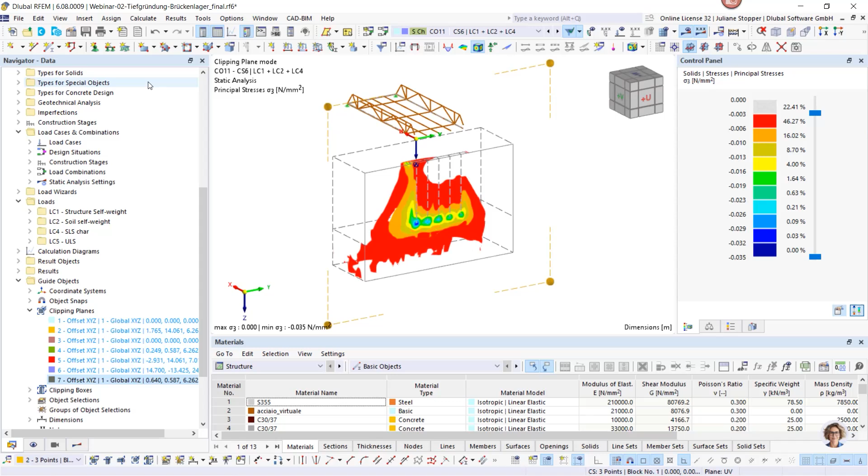And this we do here, and we can go here. Now I can see the stresses and how they are transferred into the soil. We can go here and check, and we could use the clipping planes again. I want to have it on, and I could go through the model and check where I have higher stresses, less stresses, how it is transferred to the soil. For example, this could be an overview image, and this can of course be printed too. We can check it like this as well.

I don't want to have the multi-print now, current only is okay. I do print it, and the last result that I would like to show is the trajectories. We have them too. They also give a feeling for how the load is transferred into the soil, how the soil carries the foundation. You could go through the model by moving this.

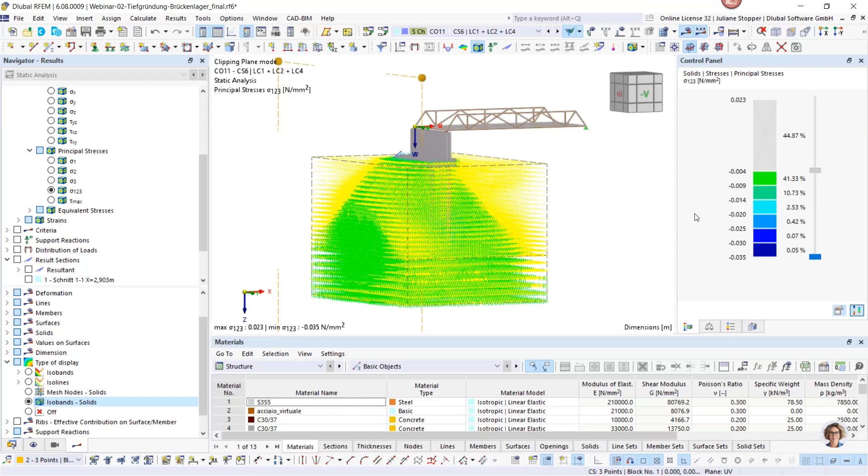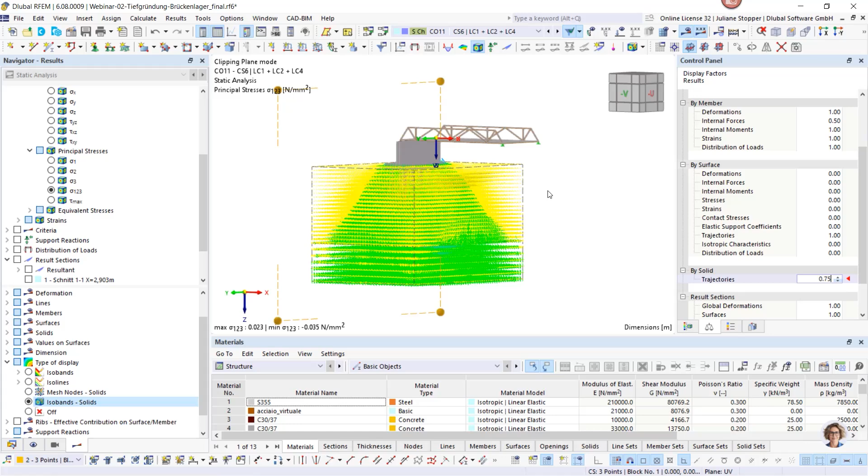Let's go back to the full view, and you can also change the trajectories, the length of the arrows, and have a look at it. Okay, but this is it for now. I think we have an overview of which results can be displayed as an introduction. Of course, there are further options which can be checked in detail with more time.

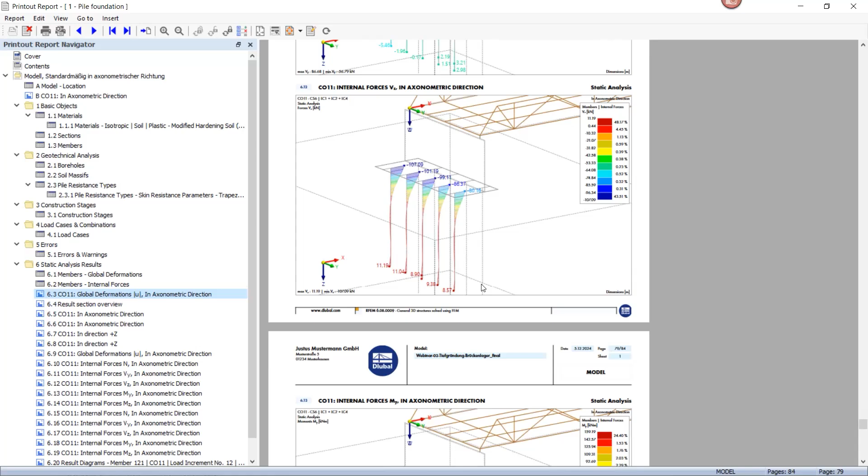I would like to show the printout report that we filled in together. So we have here all the images we did, and I would like to go through it with you. We have here the results sections, the pile deformations, and here the inner forces start, and we can see that the multi-print worked well, and so on. So this, so far, is our report.

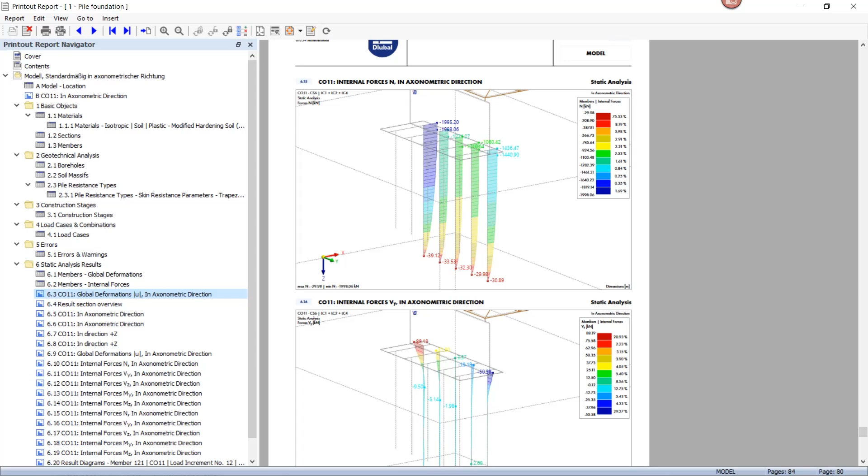Okay, then that's it from my side. This is what I wanted to show you from the models. I would like to go back to our slides to come to point 3 of this webinar. Let's go back to the slide. So now we can come to the next slide.

So what are the next steps for us? We are now in the last steps of the 2D constrained modulus method, or elastic half space method, as an option for the consideration of the soil. This means, if this option is used, it would not be the full 3D finite element analysis for the soil considered. Instead, the soil would be considered as a surface support, where the support coefficients are calculated in an iterative process with consideration of soil structure interaction.

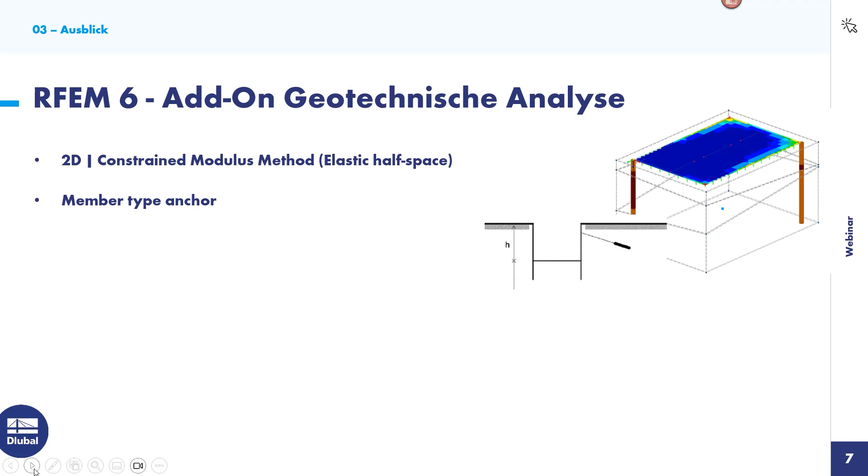Then another topic we have in the last steps is the anchors. We will have the member type anchor, which allows us to model anchors as well. Then we are working on the soil stability analysis with Phi-C reduction. This is the next step, and we are working on the Cam Clay material model, which is valid, as the name says, for clays and further materials.

And then we will have also the model type 2D plane strain. So these are the projects we are working on mainly for the geotechnical analysis add-on, and I placed them here in the right row. The 2D constrained modulus method or elastic half space method and the member type anchor are the next steps, and the others will follow.